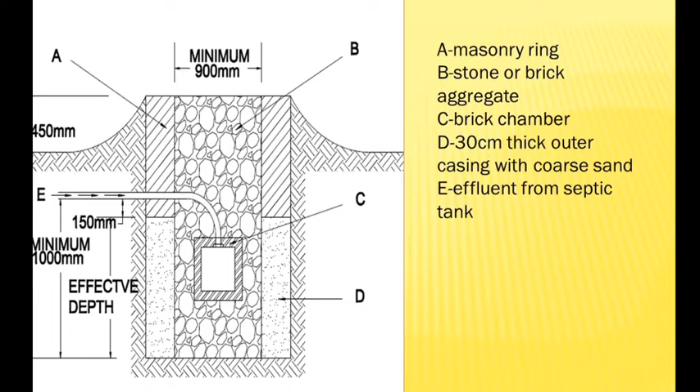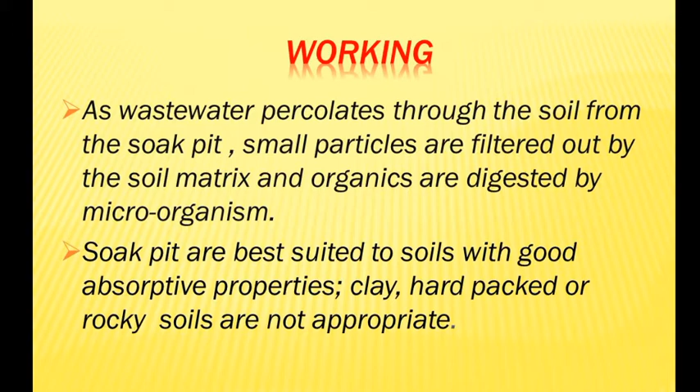Okay, so how a soak pit works. As wastewater percolates through the soil from the soak pit, small particles are filtered out by the soil matrix and the organics are digested by microorganisms. Soak pits are best suited to soil with good absorptive properties. So clay, hard packed or rocky soils are not appropriate. These types of soil are not suitable for the soak pit, like clay soil, rocky soil or hard packed soil.

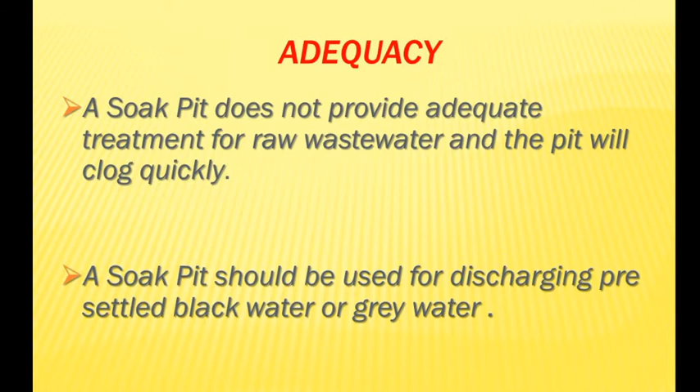A soak pit does not provide adequate treatment for raw wastewater and the pit will clog quickly. A soak pit should be used for discharging pre-settled black water or grey water. Soak pits are appropriate for rural and suburban settlements. They depend on soil with sufficient absorptive capacity. They are not appropriate for areas that are prone to flooding or have high groundwater tables.

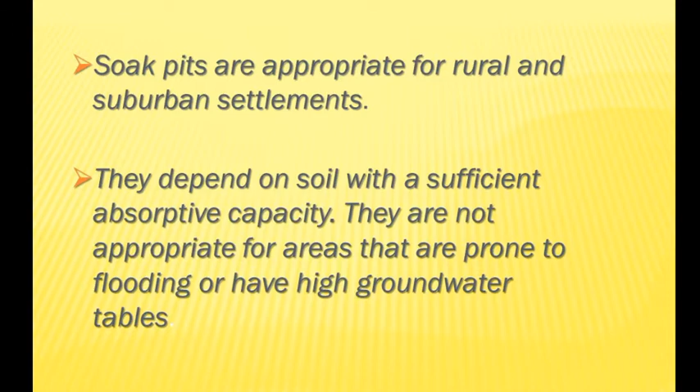Maintenance of soak pit. The effluent should be clarified or filtered well to prevent excessive buildup of solids. The soak pit should be kept away from high traffic areas. Particles and biomass will clog the pits, so they need to be cleaned or moved. For future access, removable lids should be used to seal the pits.

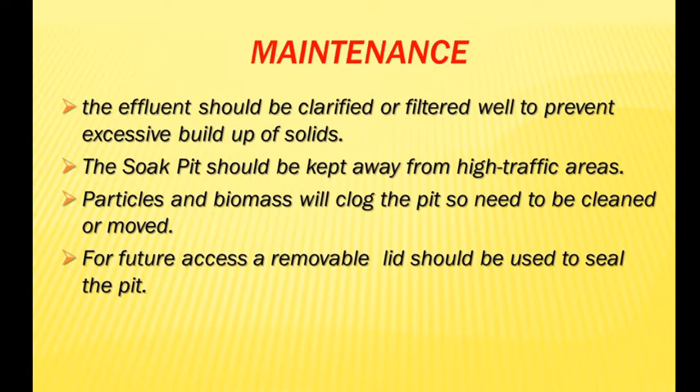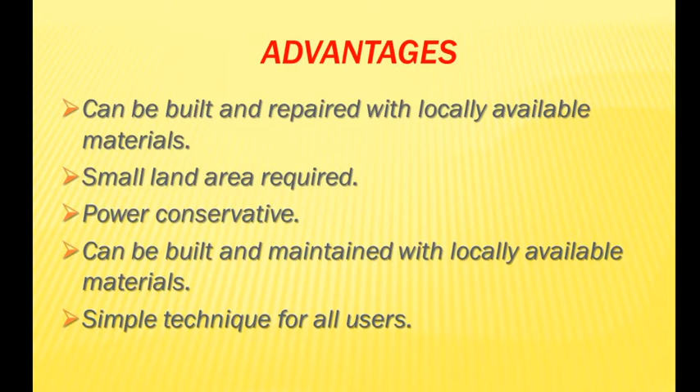Advantages of soak pit: it can be built and repaired with locally available material. Small land is required for the construction. Power conservative. Can be built and maintained with locally available material. And simple techniques for all users. Okay, so by using aggregate, by using brick bats, by using sand, we can construct the soak pit. So it can be built and maintained with locally available material.

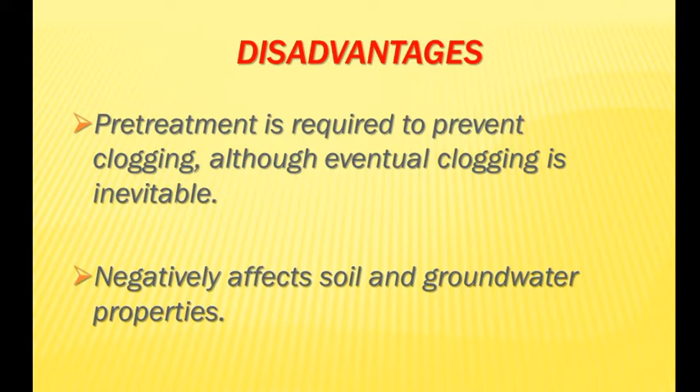So some disadvantages of the soak pit system. Pre-treatment is required to prevent clogging, although eventually clogging is inevitable. It negatively affects soil and groundwater properties. As we already discussed, if the wastewater which comes from the soak pit is mixed with the underground water, that leads to groundwater pollution or soil pollution. So it negatively affects soil and underground water properties. That is one of the disadvantages of the soak pit system, which is used for the disposal of septic tank effluent.

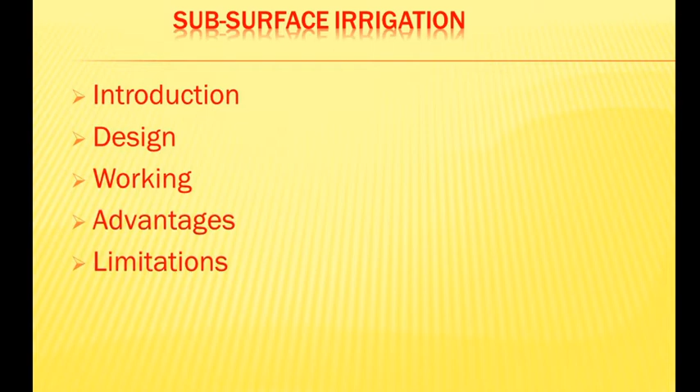So the next method is subsurface irrigation, that is recycling of wastewater for agriculture and irrigation purposes. That is called subsurface irrigation. So introduction, design, working, and advantages and limitations of this system. Subsurface irrigation is a system where the effluent or wastewater is used for irrigation purposes. The effluent is delivered directly to the infiltrative surface of the soil using specially manufactured tubing.

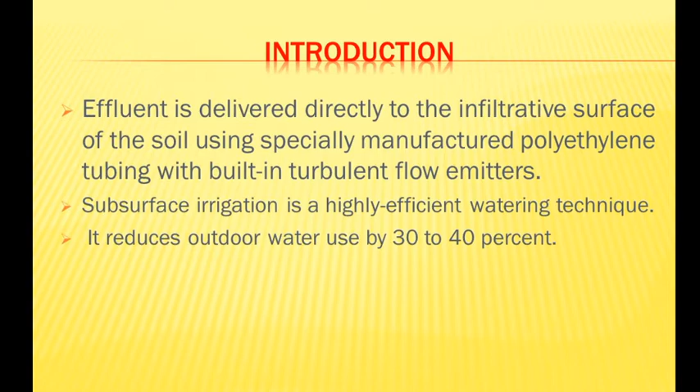Subsurface irrigation is a highly efficient watering technique and it reduces outdoor water use by 30 to 40%. So if we use this wastewater or septic tank effluent, that reduces the consumption of water up to 30 to 40% for irrigation purposes. That is one of the major advantages of recycling wastewater for irrigation.

Next, design. It consists of a masonry chamber distribution box where the effluent of the septic tank is uniformly distributed, and underground networks. These lines are placed at a depth of 6 to 10 inches below the surface, and absorption trenches 30 to 90 centimeters wide filled with gravel.

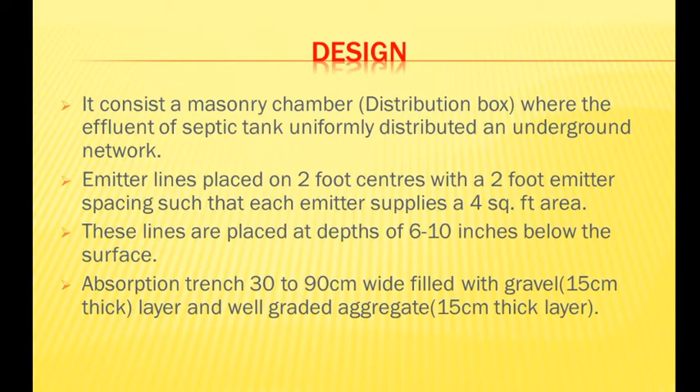So this is the subsurface disposal system: wastewater production, septic tank pretreatment and the subsurface disposal system. If we dispose that water underground, the water is filtered into the ground, into the soil layer, and that purified water mixes with the groundwater table. And evapotranspiration, that is due to the evaporation and transpiration of water from the surface. So this is the subsurface disposal system.

First, production of wastewater, sewage, which is collected in a septic tank, that is treatment in the septic tank, and after that, disposal of effluent by the method of subsurface irrigation. So in the subsurface disposal system, evapotranspiration occurs, soil absorption occurs, and the water is purified by the soil layer and mixes with the water table.

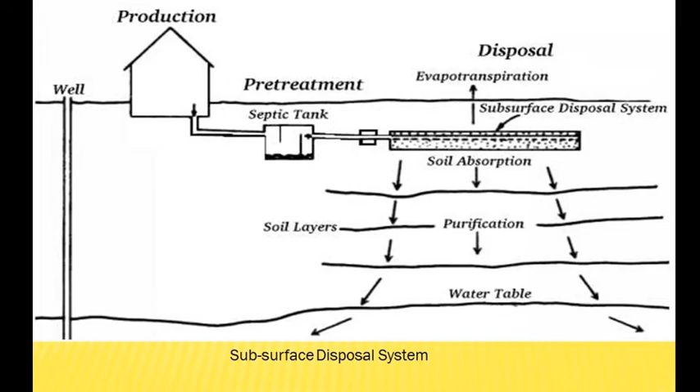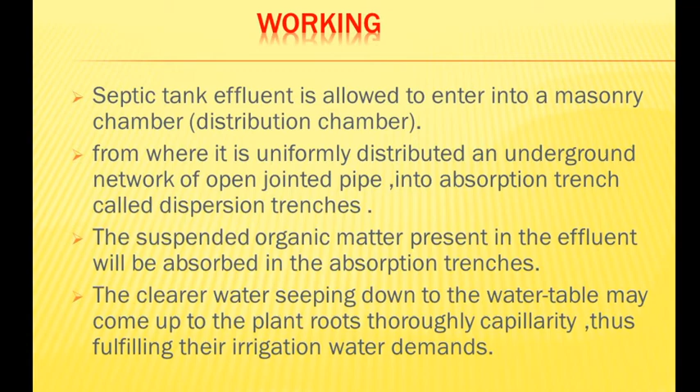Working. Septic tank effluent is allowed to enter into a masonry chamber, that is the distribution chamber, from where it is uniformly distributed through an underground network of open joint pipes into absorption trenches called dispersion trenches. The suspended organic matter present in the effluent will be absorbed in the absorption trenches. The clear water seeping down to the water table may come up to the plant roots through capillary action, thus fulfilling their irrigation water demands.

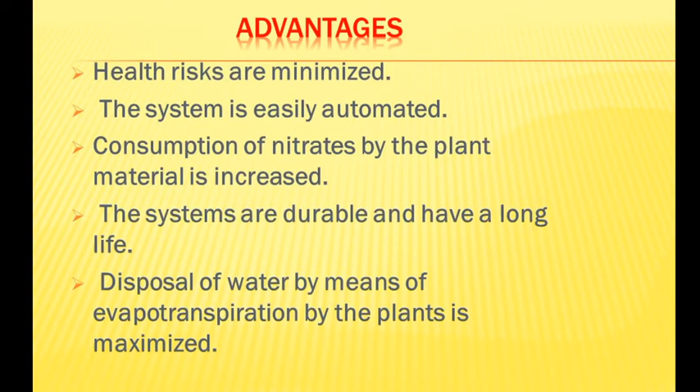So advantages of the subsurface irrigation system. Health risks are minimized because the septic tank effluent is directly disposed under the soil, under the subsoil. That's why the risks are minimized. That is one of the advantages. The system is easily automated. Consumption of nitrates by the plant material is increased. The systems are durable and have a long life. Disposal of water by means of evapotranspiration by the plants is maximum. So these are some of the advantages of this system.

Now, what are the limitations of subsurface irrigation? Clogging. Clogging is usually the result of insufficient water filtration, lateral flushing and/or chemical injection; salt accumulation, mechanical damage, crop establishment and soil structure effects. These are some of the limitations of subsurface irrigation: mechanical damage, salt accumulation, soil structural effects and clogging due to insufficient water filtration.

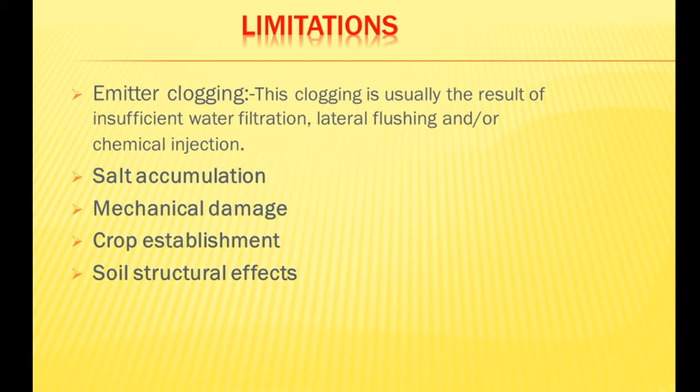So we discussed the septic tank, its design, construction and working. Next, the different systems for the disposal of effluent from the septic tank. Soak pit is one of the major methods used for the disposal of septic tank effluent, so we covered the construction and working of the soak pit. The second type is disposal of septic tank effluent by subsurface irrigation, which can reduce the water demand for irrigation by 30 to 40%. So this is all about the septic tank, soak pit and recycling of water for irrigation.